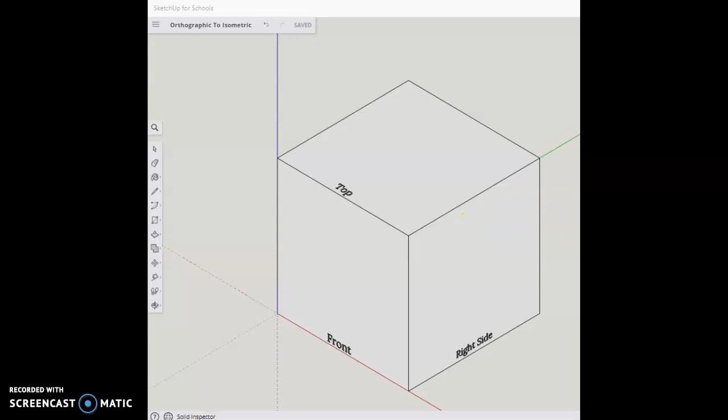So starting out here, we're taking a peek at a cube. And how we go from isometric, so this is isometric right now, I can tell because all of these angles are equal. 120, 120, 120. So those are isometric. All equal.

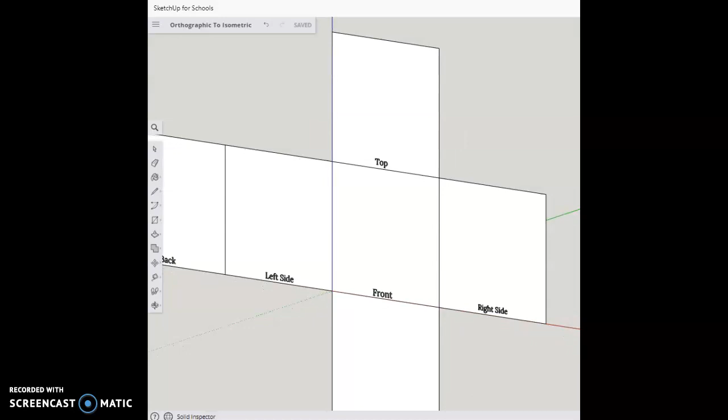To get to orthographic from isometric, basically I'm taking this cube and I'm unfolding it. But I'm keeping it all kind of connected. It's like a net in math class. And I'm continuing to unfold till they get all on a flat piece of paper. And then I square it up perfectly, so it's exactly facing me.

And what we would do then is just separate these away from each other a little bit, all the same distance. So if I'd separate this an inch up, I'd separate this an inch out, inch out, inch out, inch out. And that's how we get it. And we have 6 principal views here now. So we have front, that's our main view, top, right side, bottom, left side, and back or rear. And the back can either be on the left here or over here on the right. It doesn't really matter. It's just how we line it up.

Notice that the width is the same in all the views and the height is the same in all the views. So that's how we start out. Now let's talk about doing a little piece. Alright, we're going to turn this. Currently we're in isometric. We're going to take this and put it in, because this can't just unfold like that last cube did. This would fold up and then this would be a net. It would be kind of a weird shape.

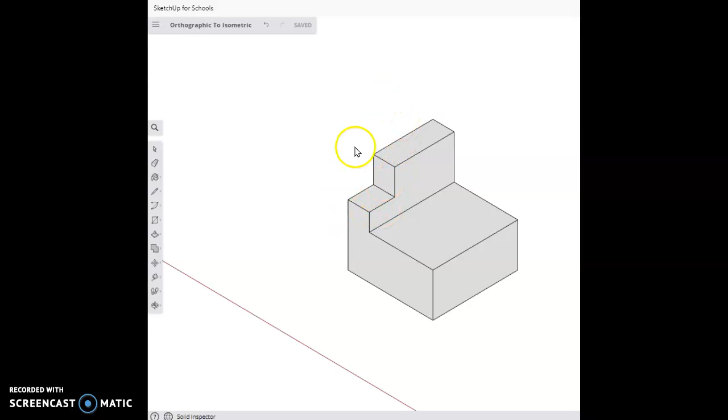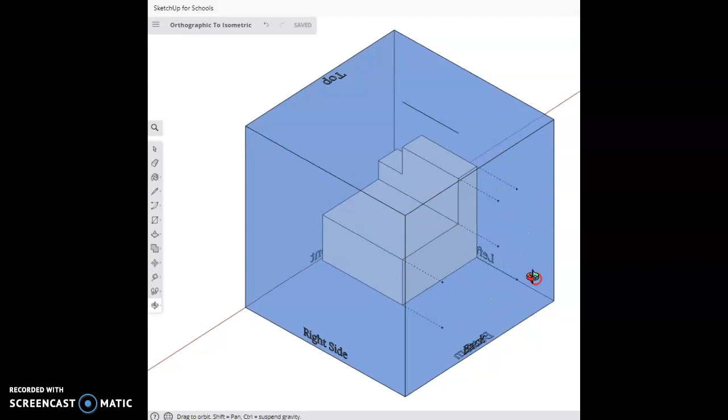What we do is we put it inside of a glass box. And inside this glass box, this is where the projection comes. These corners here get projected onto the surface at 90 degrees to it. So that's straight orthographic projection. And these corners get sent out to this glass box. I can see how those corners are touching this glass box here. And then it's just a matter of connecting these dots, where these touch. So I draw where those touch, boom, boom, boom, and that's my shape.

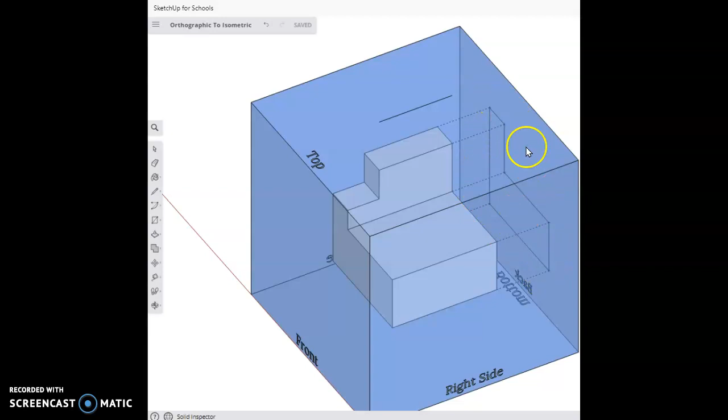You can kind of think about it as if you were going to take a flashlight and put it on this side and shoot it this way. What would that shadow look like? And that's how I get my outside shape. Now that's going to change a little bit coming up, but that gets you an idea of how that works. So I do the same thing over here. I'd be shooting it to the left side.

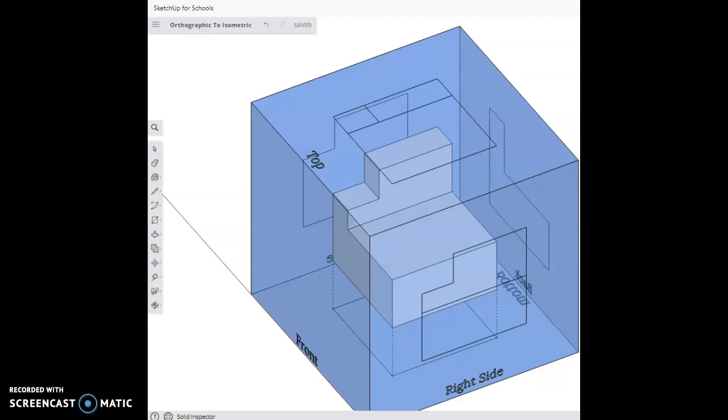Be shooting it to the top. I'd shoot it to the right side. Kind of the same process here. I'd shoot it to the bottom. Same process you can see down there. And lastly, I'd shoot it to the front.

Now this is what I was talking about a little bit. These look a little bit different. Notice this shape right here projects out to here, and this shape projects. So these are on the same plane, but there is this edge which is a line between them. So you got to understand that piece. If I was using a flashlight and shooting this in the back, this would just look like the outside shape. It wouldn't have this little line, but that little line would be there.

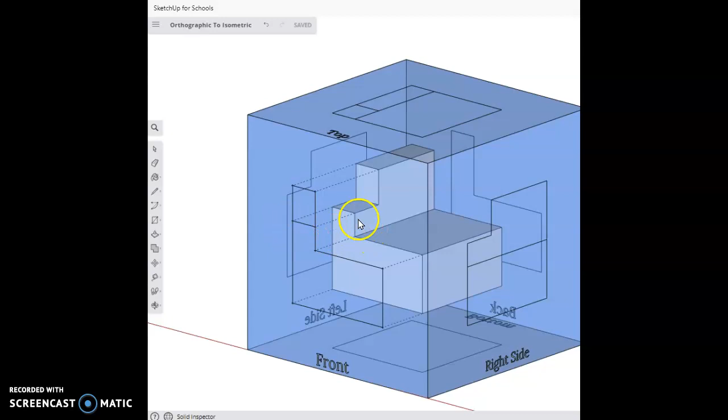Once we got all those shapes done and projected to the glass box, then we start opening that glass box up. And then we unfold it all the way, and you can start seeing what this looks like. So my front view is right here. I have this piece, which is that piece, and this little piece right here. Top view, I have this big surface, which shows up right here. This medium rectangle and this small rectangle, medium and small rectangle.

Looking at the right side, we have this larger rectangle right here. We have this shape right here that shows up. Bottom. So if I flip this upside down, I just see this full rectangle. Notice it's the same width all the way across. These are the same height all the way across. Moving to the left side. So if I go on the back side of this, I'd see this. And on the back, I would see that.

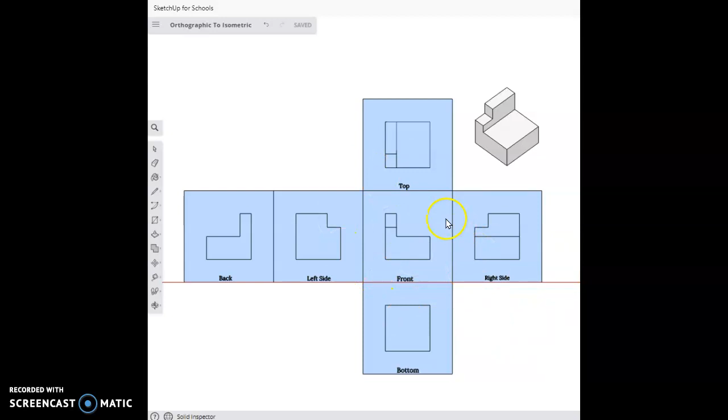Now, one thing I have not put in here is the hidden lines. Hidden lines come into play, for example, on this left side. If I look at the front, there's this corner here. But if I'm looking at it from the left side, I can't see that corner. So I would draw a dashed line across here, that's a hidden line. We're not going to talk about that right now, but just understand that there is some stuff happening here. There'd be a lot of hidden lines in the bottom that actually looks like the top, but only hidden.

This here I'm going to bring up. What this is showing is just your projection line. So this goes across and it lines up perfectly everywhere, all the way around. Project your information. So that is how we go from an isometric drawing to an orthographic projection. Hope this helped explain what we're doing there. Enjoy.